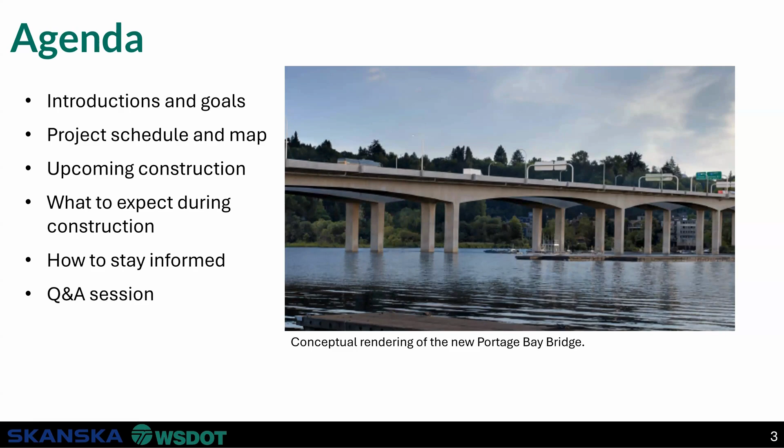Next slide, please. So our goal for this meeting is to provide you with the latest and greatest information we have about construction. So we want to make sure you folks know essentially what is planned for this year, including both daytime and nighttime construction. We'll also begin previewing some planned impacts on local streets, so we will have more information on those impacts in future meetings. So make sure that you're signed up for email updates to know when those future meetings occur.

Lastly, as this is a new project under the SR 520 program, we want to make sure that you all know the methods, new and old, for how to stay in touch with us, and we'll touch on that at the very end. Now, I will pass it over to my colleague, Robin, to discuss construction.

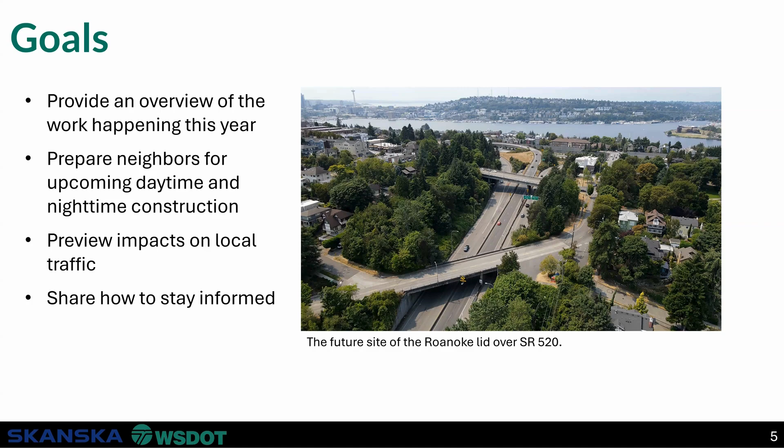Awesome. Thank you very much, Alan. As Alan mentioned, I'm Robin Clark. I'm the community liaison with Skanska and for the construction project. So I will be attending these meetings and you'll probably see my face quite a bit as the construction progresses. So I hope to get familiar with everybody that's in attendance today. And I appreciate you guys joining to hear more about our project because we're getting really excited to be here, getting excited to get started and work with you guys throughout this process.

So I'll run you guys through our project schedule, some of our current progress, what to look for in the coming months, and then what to look for throughout the project. High-level overview on our project schedule.

You can see on the yellow star that we are in the early stages of 2024 construction planning. Our first activity on the books is going to be our Portage Bay Bridge construction on the north side of SR 520. I'll show in a minute a graphic of our overall project. We're going to be building 2 new SR 520 bridge structures, and we will be removing the current SR 520 bridge.

We're also going to be installing a new lid structure on the Roanoke side of the project that will be connecting the north and south neighborhood across SR 520. Right now we are in the design phase. We're under a design build contract, so we're contracted out to design the rest of the project that WSDOT has provided us.

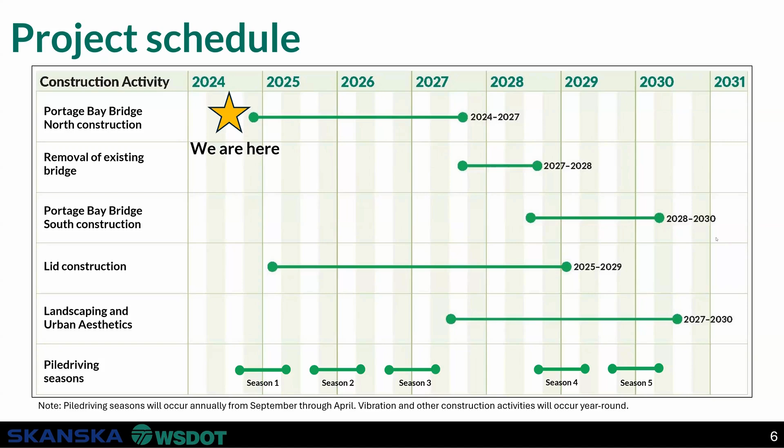So what are we doing this year? I want to talk through a handful of our major construction activities beginning this November and walk you through what we're expecting this year into early next year. We'll have more monthly construction meetings to talk about details in later years and months as we get through construction, but we want to talk through right now what is going to happen in the immediate future.

Starting in November, we will have crews focused on the following activities: pile driving in Portage Bay for this first season of pile driving construction; barges that we're going to be utilizing for hauling material for our work trestle; using the hauling and access route on East Lake Washington Boulevard, similar to previous construction and contractors, to access the WSDOT Peninsula Yard for staging; starting some tree removal, clearing and grubbing around the Boyer Avenue East area and the hillside adjacent to SR 520; and continuing some lane closures and flagging activities, with some traffic impacts primarily on the west side of the project, but some on the east side as well.

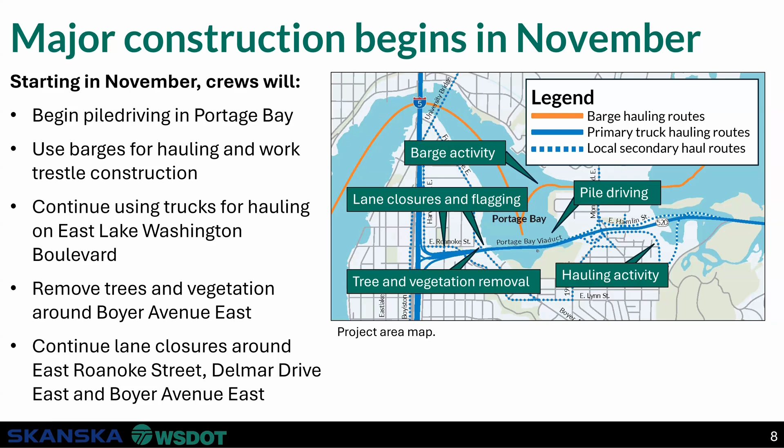Starting off with pile driving is one of our bigger activities. We're constructing the new SR 520 bridges, and on the outside of those bridges, in order to construct them, we're going to have to build a temporary work trestle. This allows us to get our equipment in and out over the water and actually build the bridges. We'll barge in all of this material and we'll be pile driving to put in temporary columns, eventually placing crane mats and other material to create a deck and a platform to access the work.

The pile driving for this season is scheduled to begin November 4th and run through the end of April next year. Pile driving occurs in these seasons from September to April, happening annually for the next 5 seasons, although we anticipate only 4 of those seasons will have heavy pile driving activity. We'll be working 6 days per week on this schedule: Monday through Friday, typically 7 a.m. to 10 p.m. with pile driving activities, and Saturdays from 9 a.m. to 10 p.m.

We do tentatively have some Sundays, but we are not scheduled on any at this time. We just have those essentially as a backup if we need to resume some additional operations for that week.

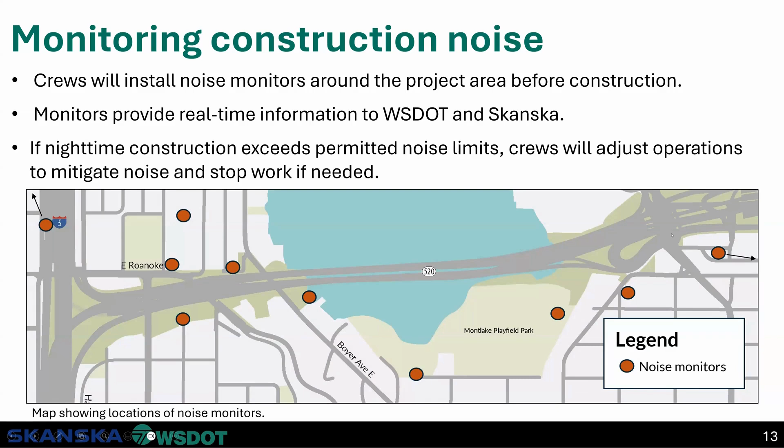So generally, what to expect with noise. I know we're getting pretty heavy into the detail, but I just want to make sure you guys are prepared for what's upcoming, and aware of what's going to be going on with our construction.

As part of the noise for all of our construction activities, pile driving included, there are really 3 types of noise levels you guys are going to expect on the job. We have our daytime construction, and we have 2 types of permitted nighttime construction. The first is under a temporary noise variance, which I will explain shortly. The second is under our major public project construction noise variance, which is a mouthful, so I am going to reference it from here forward as the MPP-CNV. Both of those are permits that go through the SDCI, the Seattle Department of Construction and Inspections.

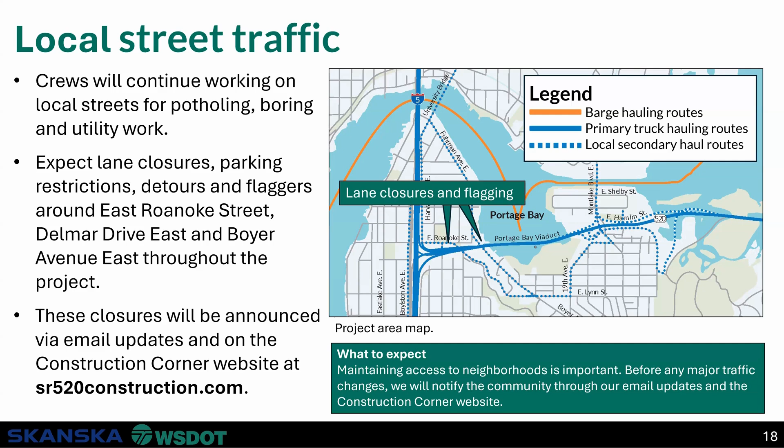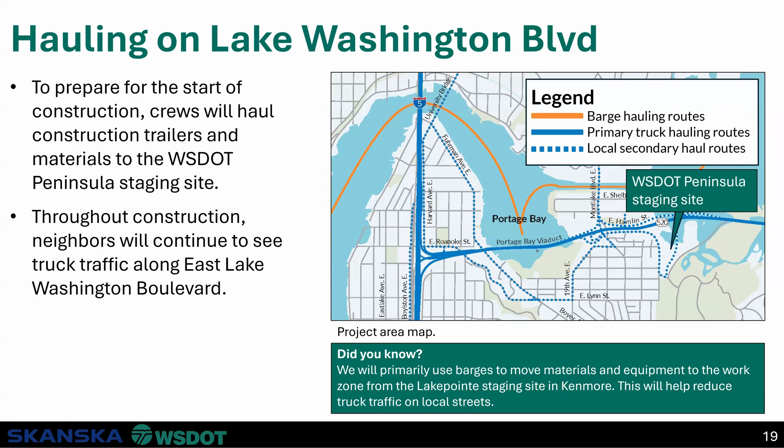Part of this traffic, you may see some increase from the last several months of hauling on Lake Washington Boulevard. I note that because it'll be similar to what's been observed in the past. We will be mobilizing in there with some of our crews and our own equipment from the previous contractor, bringing in very similar equipment—excavators, loaders, trailers—with some material that we might stage for the short term in order to construct our trestle. Some of those activities will be occurring over the next several months, and generally over the course of the project we will be in use of that yard.

Separately, but similarly, we will have some water traffic. With the pile driving, we have a staging yard up in Kenmore—our Lakepointe yard. We are going to be staging the bulk of our trestle material at this yard and barging it down to the project. Our barges will be used during the week, generally from 7 to 5, to bring all of this material back and forth. On average, we'll have one barge making that trip two to three times a day from the Lakepointe site, and that may increase or decrease throughout the week.

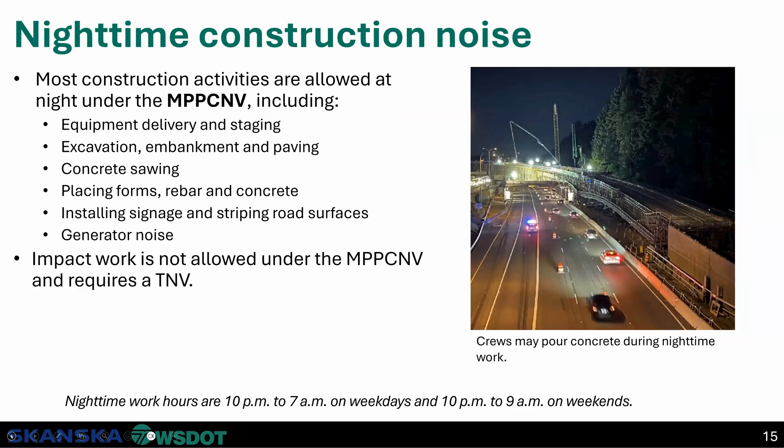Pete has a question: Will the work trestle be in place for 6.5 years, and how many piles are expected? Great question as well. The trestle will be in place for about that time, I'd say through the 6th season. So probably after about 5.5 to 6 years we'll be removing the trestle - in place for almost 5.5, maybe 6 years. And we're expected to install over 700 piles, though I don't have the exact number.

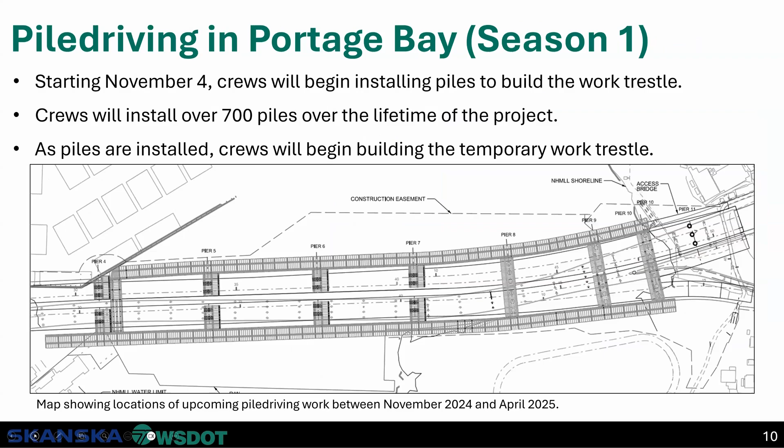I believe Dakota will pull that up shortly. The placards are the large posters that say whether a tree is scheduled to be removed or protected. The trees have all been tagged thus far - I want to say we have tagged and identified around 1,200 to 1,300 trees, off the top of my head.

And then the placards we have not posted yet. We're working on a bit more messaging that we want to provide to community members who haven't been able to make it to this meeting before we start posting those placards. So on that, the photo on your right hand side with the yellow placard, those will come out probably in the next week or two once we get more messaging out to folks in the neighborhood.

And just one thing to add to that as well. In addition to the placard shown on the right-hand side of the screen, there's also a protection permit. So if you're walking around your neighborhood and you see these types of papers posted on trees, that doesn't necessarily mean they are all going to be removed. Keep that in mind as you're traveling your neighborhood, and pay attention to the specific language on there. As Robin said, these removals will be posted 30 days in advance before any action is taken.

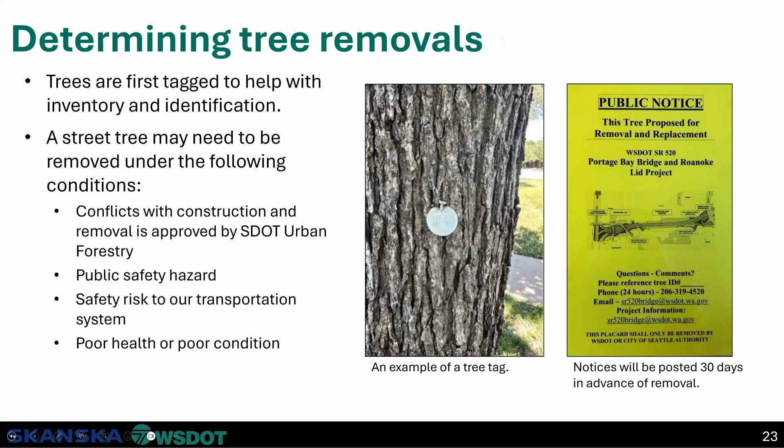Question from Greg: You said there will be overnight accommodations for residents who cannot sleep through your noise. In past experience, WSDOT has declined to offer that. What do we do if nighttime noise is excessive and at say 1 a.m. the workers tell us too bad, we have a variance? A good question as well.

I will say we'll probably address this on a case by case basis. We are offering the hotel overnight accommodation, so we are not declining those offers. We are targeting folks in the radius of those impacted and noisy operations. But if you do find yourself in a situation where it is noisy and you have not been offered the hotel accommodation, you can call our hotline and we can work through some of these issues if that scenario arises. I don't have a specific example for that at this time, but I can follow up on that.

Yeah, and just as a reminder, the outreach team is available 24/7. We have a direct line to the construction team. For folks in the general vicinity of where noisy work is going to happen, or work that requires a temporary noise variance, all those people within a certain area of that work will receive either a flyer, an email, or some sort of notification letting them know that we are offering hotel accommodations for them. So we'll be launching a pretty simple form over the next couple of weeks as TNV work might start, but just be on the lookout for communications from the outreach team being proactive with offering those accommodations to you.

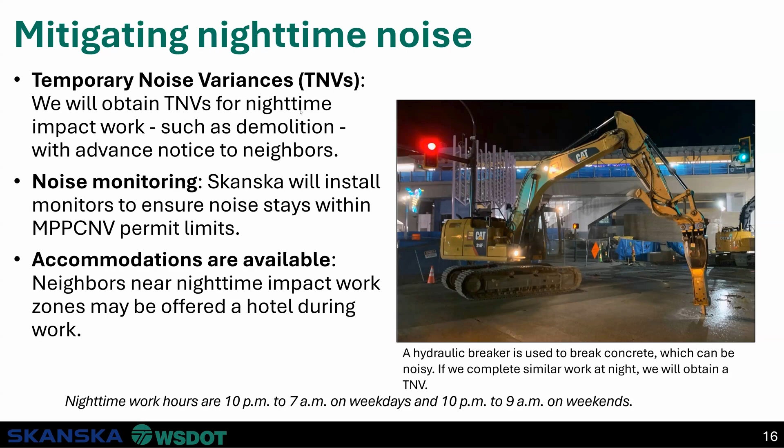We have a couple of questions regarding the tree tags. A question from Jim: I've noticed these silver tree tags on several trees toward the south end of Roanoke Park. Are there any plans to remove any trees from within the Roanoke Park Historic District, the land north of Roanoke Street? At this time, we do not believe we have any plans to remove those trees. If we do make any changes, we'll have to go through a reapproval process and a permit update. But at this time, we don't have any plans for that.

Thank you, Rob. A question from David Scott: Do you have any idea when you'll be ready to talk in more detail about the design of the temporary overpass over 520? We can add that as a topic for an upcoming monthly construction meeting. We have a decent amount of detail on that design. We've received a lot of comments and really good feedback from the community regarding interfacing with traffic versus pedestrian and biker access when that temporary overpass is constructed. That is something we are still looking into, so that conversation may be a little further down the line as we develop those plans, but we can still cover it at our monthly meeting.

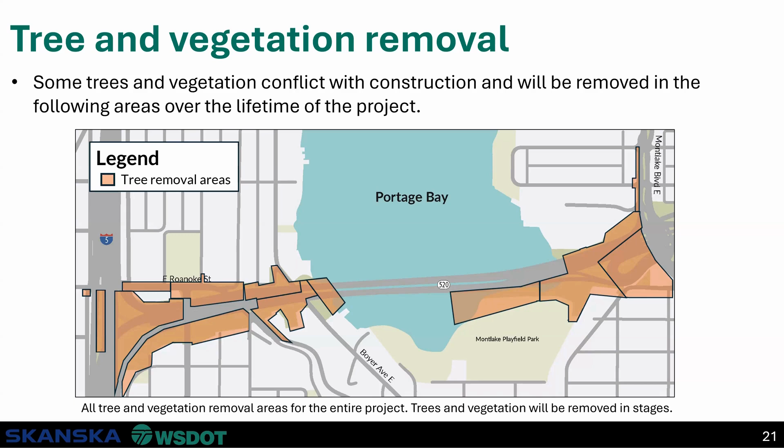We have a question from Carl: Can you be more specific about the vibration limits allowed at the Boyer 520 area? I think that one may be better answered via email, so I can provide the actual limits of what we're allowed, because if I quote you off the top of my head, I'll be wrong. There are some pretty specific limits based on studies that WSDOT conducted prior to our project, which we've applied to what we've got going on here. So we can provide that information as a response. Yeah, we'll track that as one of our additional follow-ups.

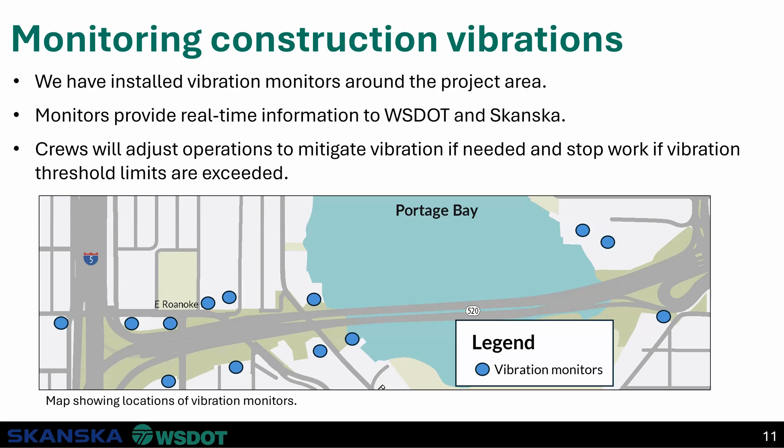Keith has an additional question regarding the trees again. Sorry, one more question about tree removal along Roanoke. I read that Seattle Public Utilities has a project linked to this project, moving the power lines underground and also a water line relocation. If those impact the trees along the park, would this construction forum alert us, or is the city doing that separately? I don't know if the city is doing a separate item, but any tree removal linked to our project will be facilitated through us, unless Seattle utilities decide to remove something on their own. We are clearing and removing trees and vegetation ahead of those water line relocations.

Yeah, so those alerts may be in the form of an email update. We are planning to talk a little bit more in detail about the Seattle City Light electrical utility relocation at one of our future meetings. So we'll go ahead and keep you folks in the loop. Make sure to sign up for our email updates to know when that topic is going to come up.

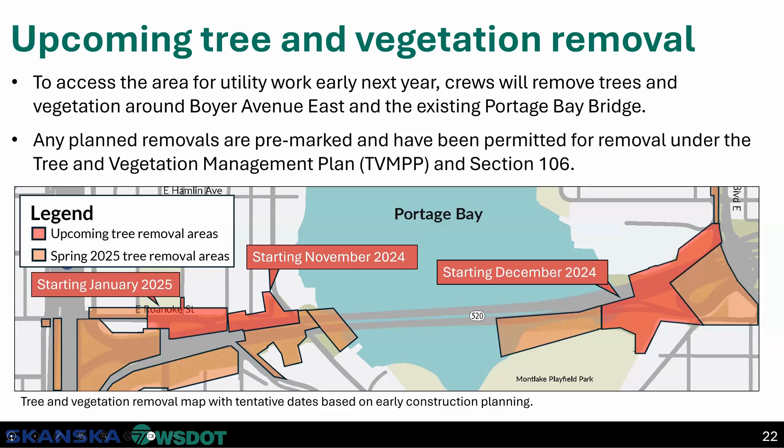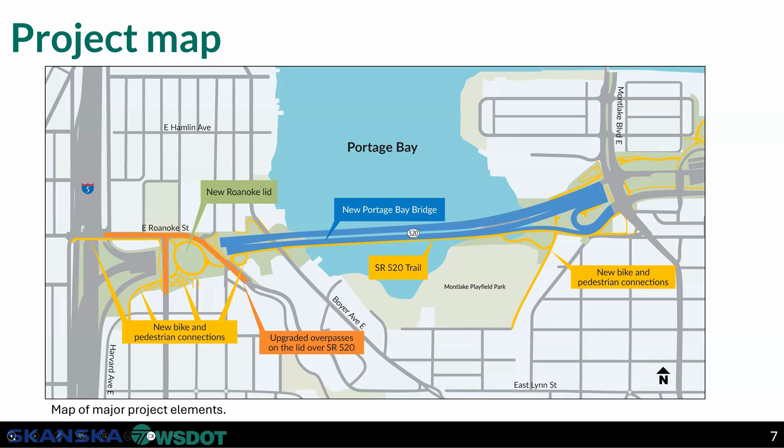Great, thanks Robin. That brings us to the end of the questions that have been submitted thus far. We'll go ahead and just let it linger for a minute in case additional questions come in. Let's see.

Jennifer, I see your question about camping under the bridge. For all of our construction areas, we'll be fencing those off with our own construction chain link fence, securing those areas. We're also having subcontractors help us with some relocation efforts and cleanup efforts in these areas. So we are looking to secure our work zones in order to deter any additional folks from entering the site that aren't construction personnel, and not only for the camping, but to also protect the public interface.

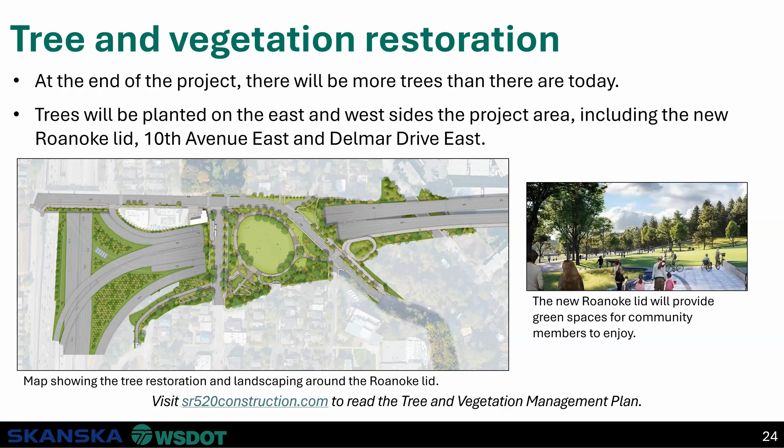Likewise, Greg, and thank you to everybody online. We'll continue to stay on here for a couple additional minutes. I do want to note, right now, this again is our first meeting here. We picked kind of this 5:30 to 6:30 timeframe based on some other construction projects that have had similar times in the past. But we are open to your feedback if we need to adjust that slightly to maybe a 5 to 6, or a little bit later, or we can do an earlier in the day if it's like a lunchtime call. So we are open to that. Again, you can reach out to us via the email or other contact method if you'd like to provide some feedback on the time frame.

And then just on behalf of the Skanska team, we'll be around for quite some time. We'll be your new neighbors. So I just really appreciate you guys listening in and providing us with your questions. Our goal here is to communicate with you guys and make sure you guys are in the know as much as we are. And yeah, just keep talking to us.

Yeah, the conversation does not end at 6:30 on October 15th. We are available 24/7 via the hotline and also always at the project inbox as well. So if any questions come up later on, maybe you're stewing over something over dinner and you're like, I really wish I would have asked that, you have opportunities to do that. You don't need to wait until the next monthly construction update meeting in November.